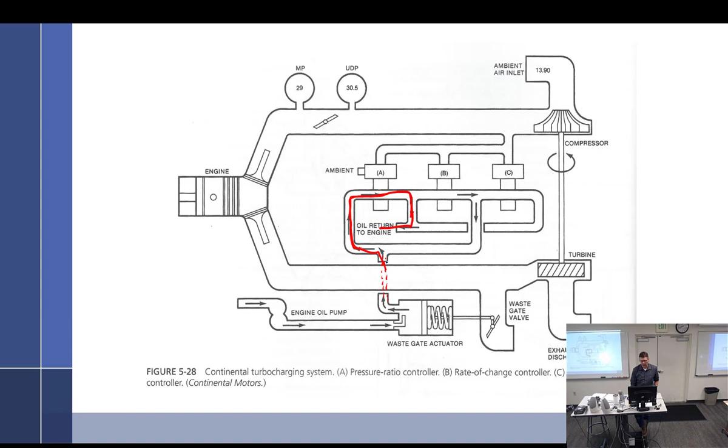So let's see. So we've got, so this will come through here. It can go through A and return to engine. We come up through here. That shows it. This goes through C and out. And see if we can get an independent. That has its own independent. So each one has its own independent route.

Why did the arrow show flow going backwards from the direction you're going? It doesn't. Oh, it goes backwards. Maybe the way I just drew it. So it's showing everything is... well, pressure is pressure. It can go either way. So 1, 2, 3. You can look at it that way, I guess. I was just trying to do it a different way.

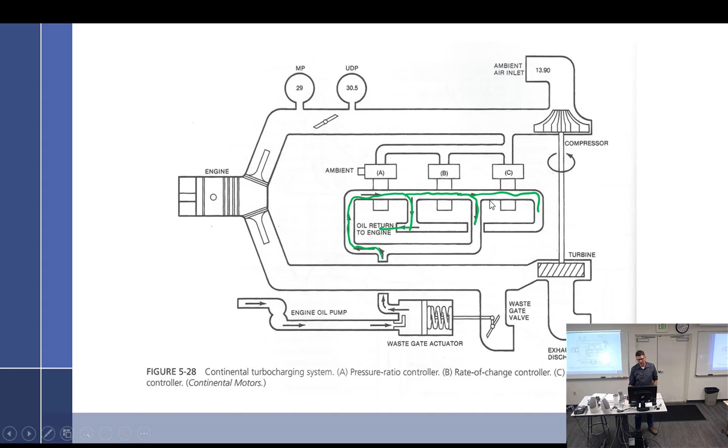But so they're in series or in parallel. Are they independent or not independent? They're independent, so I make them parallel. So each one can override the next one, which was the point there. All right, so we'll go to this.

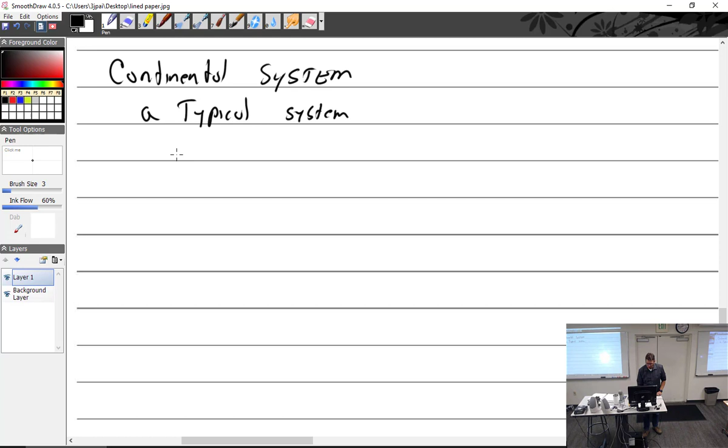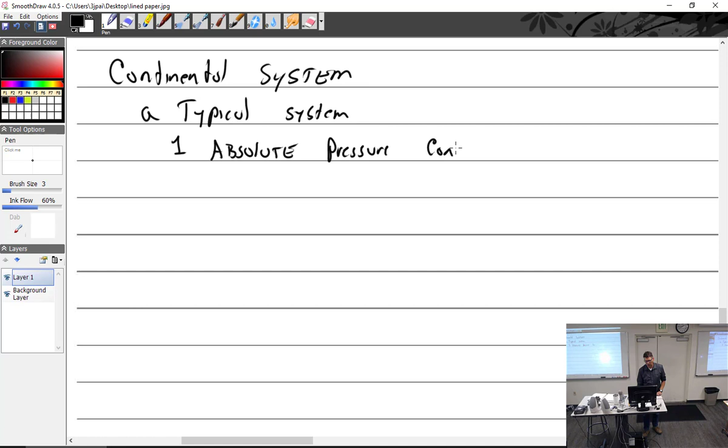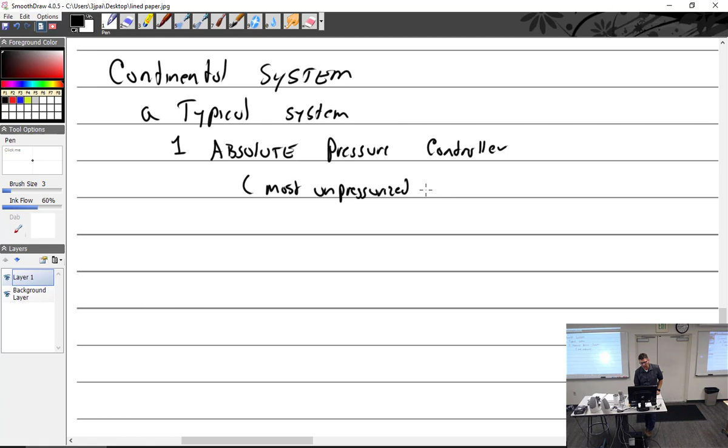All right, the Continental system. The typical system, typical Continental, because you can always get a variation of this. We have an absolute pressure controller. And I did have a note that I found somewhere that most unpressurized systems use a cam. So cam, that's the only note I wrote.

So I'm just going to think at one point I noticed that you had a throttled cam that would go just like we saw in Lycoming, that would adjust that absolute pressure controller, kind of like it would be the one we looked at, the variable pressure controller. Number 2, we have a rate of change controller. And number 3, we have the pressure ratio controller.

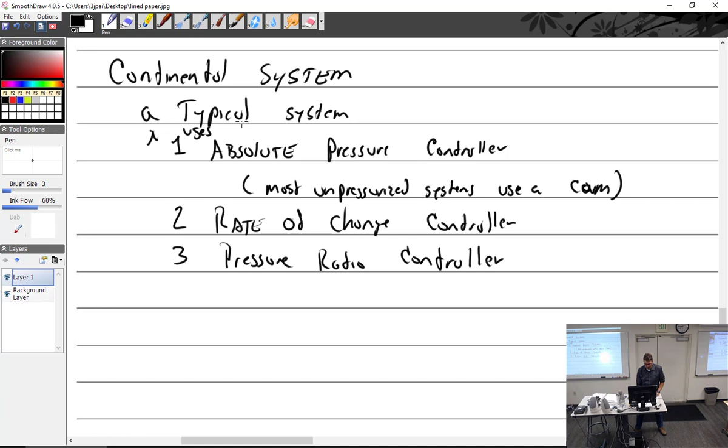So this is like one. Should put there, uses 3 different controllers. Number 2, all controllers are vented to or sense upper deck pressure. Just going to go back to this real quick. All of them sense upper deck pressure. So this is upper deck pressure up here. You can see every single one of them is connected to upper deck pressure.

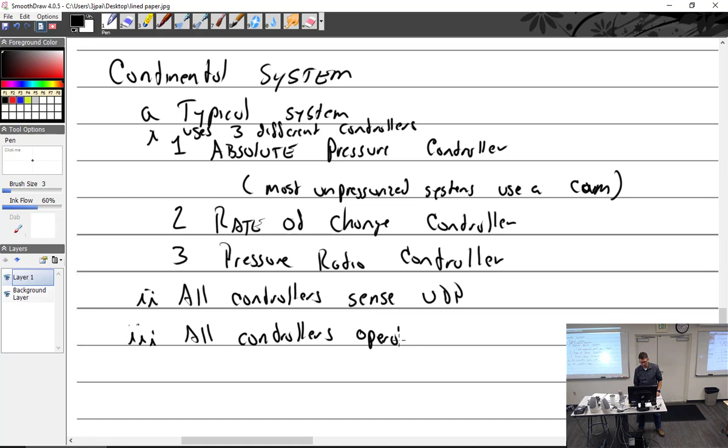All controllers operate to restrict or bleed oil, just like Lycoming. Oil, I'll say from wastegate, like the Lycoming. So nothing different there.

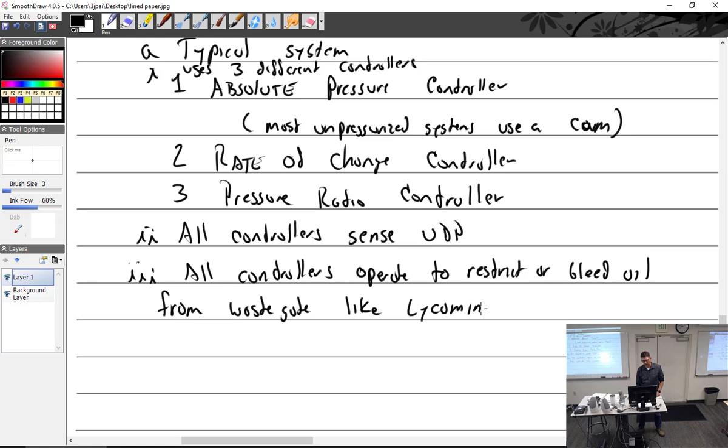But looking at each one independently, we'll start with the absolute pressure controller. That is designed to limit the maximum upper deck pressure. So if it goes above the specified amount, it'll open up and release. That is it. Okay, so absolute, so it's going to set your top end to that. Like the density. So you got it, so just like the density, we'll see. We'll put, design to limit maximum...

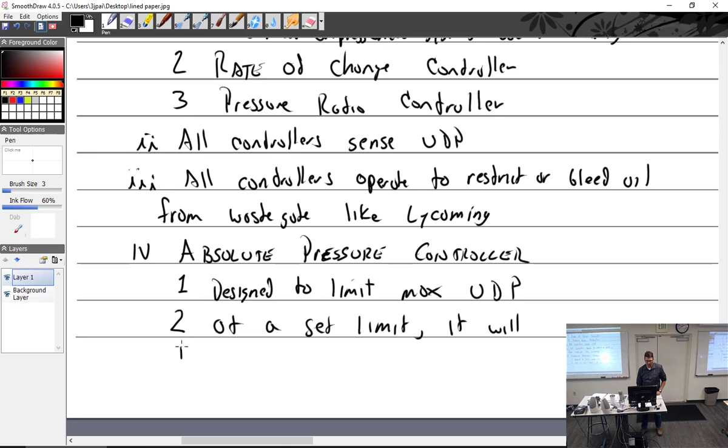Upper deck pressure. And number 2, at a set limit, it will bleed off oil, right? Open up, bleed off oil, let the wastegate start to go towards open. Turbo off. Can I move over? Okay.

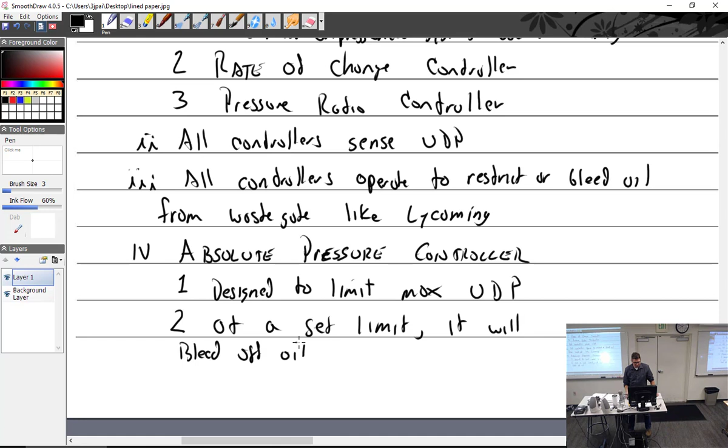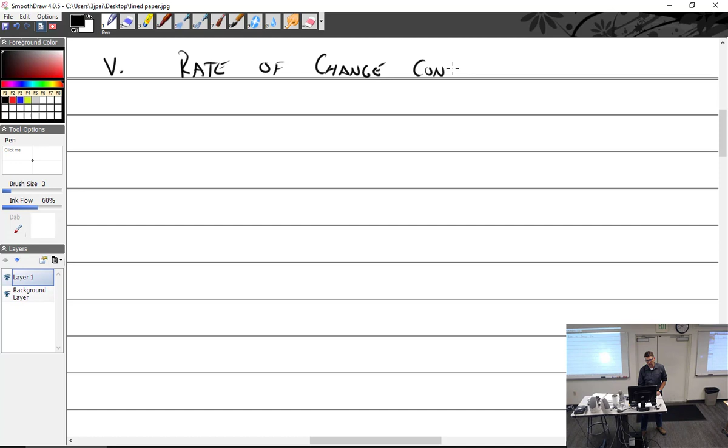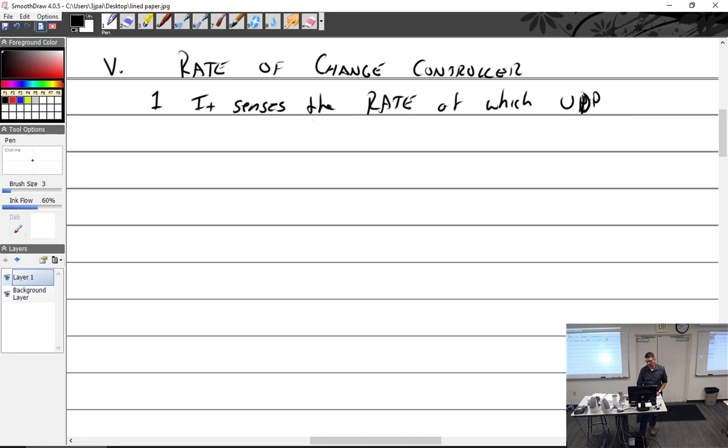Number 2, rate of change controller. Actually, it's not number 2, it's the second one, but it's point number 5, rate of change controller. It senses the rate at which upper deck pressure increases. The rate at which upper deck pressure, UDP, we'll get it down there, UDP increases. If the rate is too fast, controller opens, bleeding off oil, allowing the wastegate to start to open, causing the turbo to slow down.

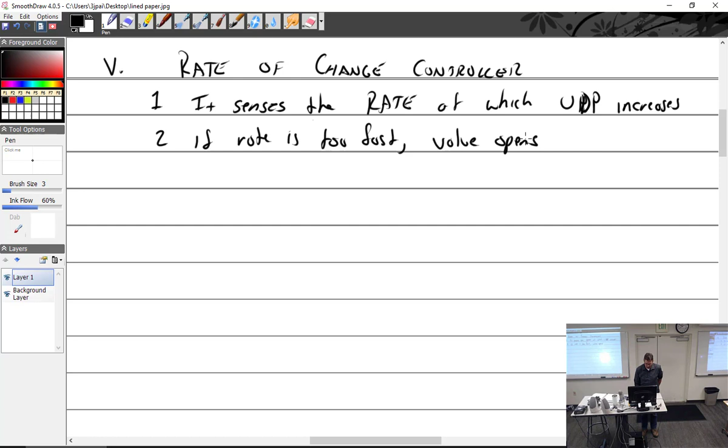Somewhere around here I had the actual number of what the rate was, and I don't know where I did with it. But, okay, next one, the pressure ratio controller. Which sounds a lot like differential pressure controller. So at higher altitudes, let me see.

The difference between this one and the Lycoming version is where it's sensing it. Notice there's no reference to manifold pressure, so it's strictly sensing ambient. Instead of the difference between manifold and upper deck, it's upper deck and ambient pressure, so it's going to be just a slight difference there.

At higher altitudes, the turbo obviously has to work hard, must work hard to keep upper deck pressure at maximum.

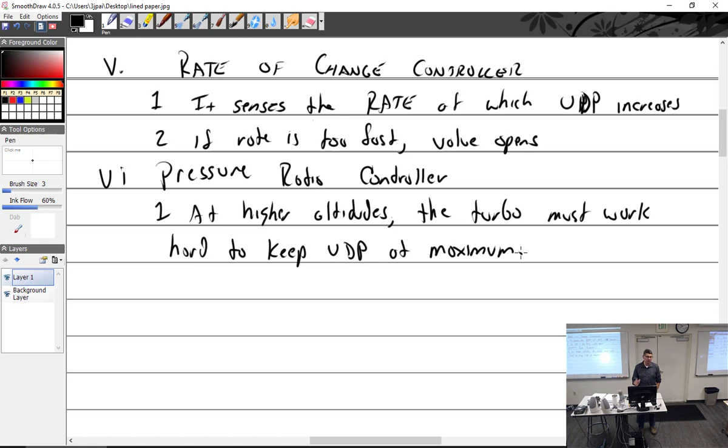So actually what I wrote: at higher altitudes, turbo must work hard to keep the manifold pressure set—it should be upper deck pressure set for max horsepower. So at maximum, I'll put horsepower.

So if you think about it, the absolute pressure controller's job is there—we have an absolute pressure controller, and it wants to see what in the upper deck? Pressure. How much? Whatever. All of it, right?

So the first one I talked about, the absolute pressure controller—its job, you can see, is designed to limit maximum upper deck pressure. So if we said, all right, even if it's just a normalizer, we want it at 30 inches. We get up to this high altitude, and the absolute pressure controller wants to see 30 inches, so it's telling the turbo, you got to keep going, man.

You got to keep going. And at some point we're going to get to an altitude where that turbo is just screaming. If it has the capability, it's going to keep packing air in, but the air is going to start getting really hot. So now we're going to start getting our air too hot, and we're going to start having some problems. So we don't want that.

But how are you going to program in the absolute to take care of this? Well, you don't—we'll put in the pressure ratio controller, just like Lycoming did with their absolute and then their differential controller. But this time we're not looking at the same differences; we're just looking at the difference between atmospheric and this controller. So it's another way to say, hey, pay attention to where we are in altitude, which you didn't get before.

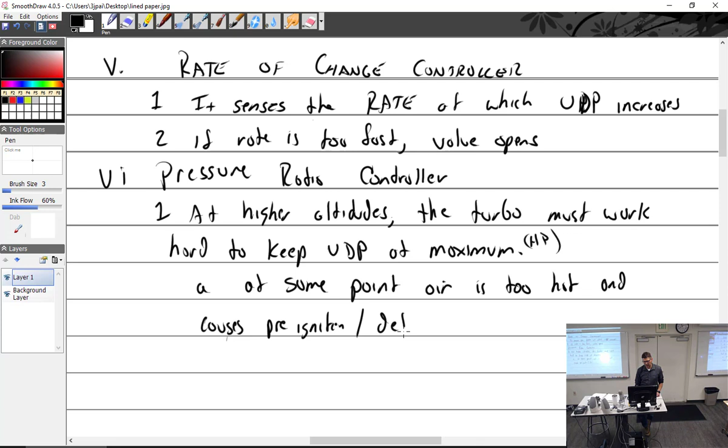But at some point the air will become too hot, causing detonation—the ratio controller keeps that in check. Air is too hot from the compression and can cause detonation or pre-ignition. And this pressure ratio controller, the PRC, keeps this from happening.

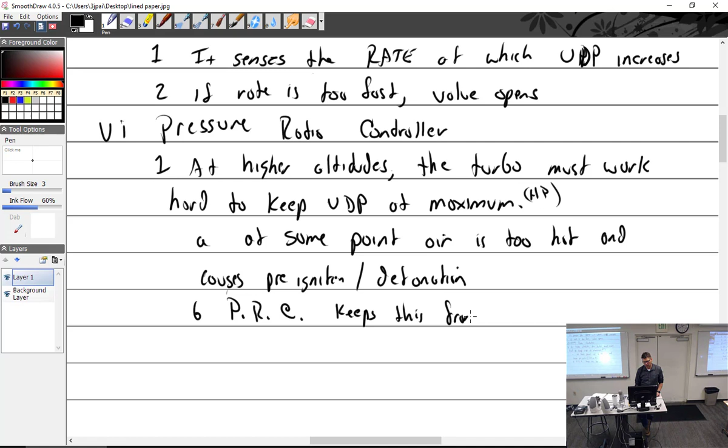And how does it do that? Well, it monitors the ratio, or difference, between upper deck pressure and ambient, and limits it to 2.2 times ambient.

Kind of think it through a little bit—if we just did 2 times for simple math. So if we're on the ground, 30 inches, this controller will allow it to go up to 60. Will it go to 60?

No, because the absolute pressure controller says, no, you don't. This one's like, yeah, but I want to go more. The absolute pressure controller opens and says, you're not going to do that.

So we start going up in altitude, and we're going to get to some point—I don't have the math in my head for that one—where this one right here is going to say, all right, we're at the limit now, we're kind of at 2.2. We're getting there; it's been closed the whole time. Got to 2.2, and over here the absolute's closed and that one's closed. They're both going to be happy for just a brief second, and we keep going up.

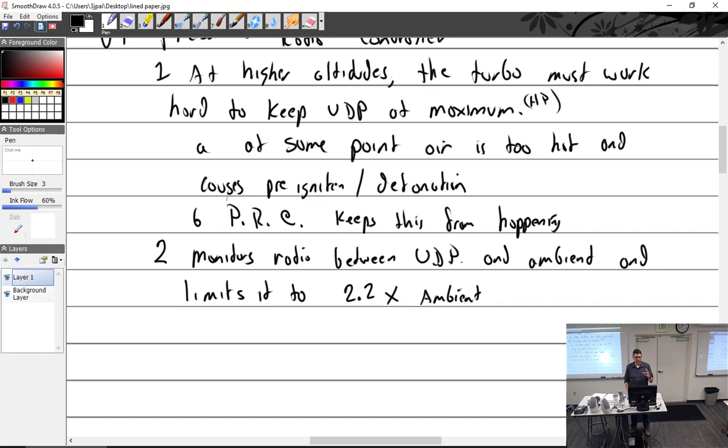All right, so we've started it up, we're running it, and we're idling it. So manifold pressure is going to start increasing until which one says no, you don't? And the words are right there if you can see them. Absolutely. I don't think not so much. My opinion - absolutely, I think absolute. Yeah, absolute would, if it can, at idle. Yeah, I think that'd be the first one.

Perhaps, let's just say, if you had a pretty fast idle going on there and the thing started to spool up and come up too fast, then it would definitely be absolute - the rate of change. Okay, then eventually it's going to be the absolute. And the rate of change isn't really going to have an effect unless you're actually moving the throttle forward. So let's just say then we line up on the runway, we're ready to take off, and we smash the throttles forward to go. Then rate of change - I think the rate of change will be the first one to pop off.

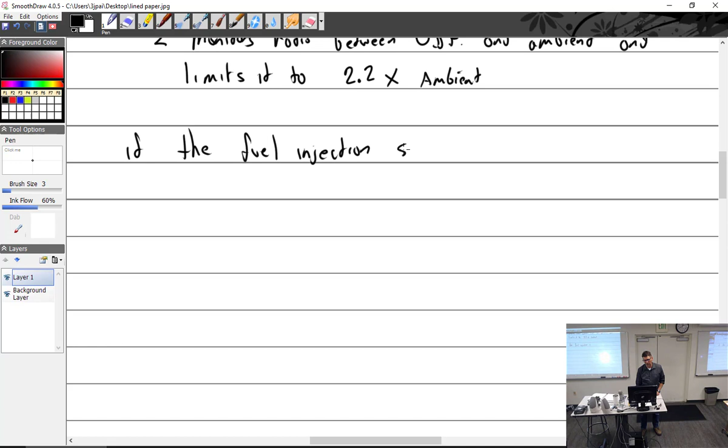All right, so one thing - I wish I had a picture, but I don't - this is an interesting point here. So if the fuel injection system, because this is going to be a Continental system, uses a variable orifice fuel pump.

Do you remember what this is by chance? PR, no, that's pressure. Okay, so we're going back to the fuel injection system from last week. Some of you are like, damn, that was last week, how am I supposed to remember this?

If we remember the fuel injection pump from last week for Continental, it didn't sense air, it sensed fuel. But the fuel pump had two controls, two settings, high and low. On the high end, we could actually put an aneroid on there and make it a movable orifice. It's adjustable, but you have to have a chart that'll tell you, if you're at this altitude and this temperature, adjust it for this fuel flow. But then from there, it's going to be sensing upper deck pressure.

So what would happen is, if upper deck pressure is really high, manifold pressure, that would make more sense. If manifold pressure is really high, do we want more or less fuel? We want more. A lot of air, we need more fuel. To get more fuel out of the TCM system, we go back to the main metering orifice.

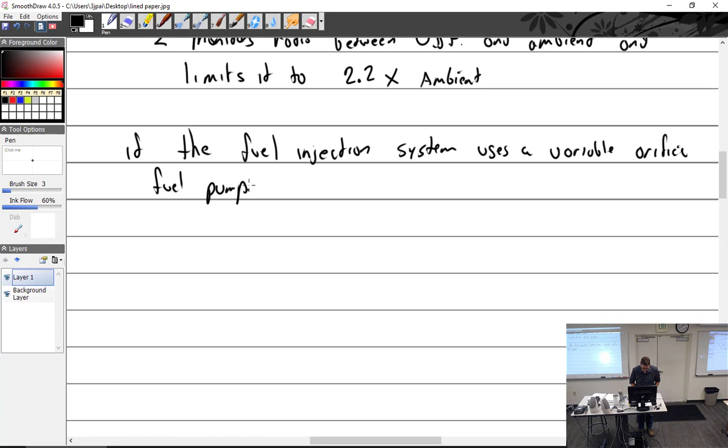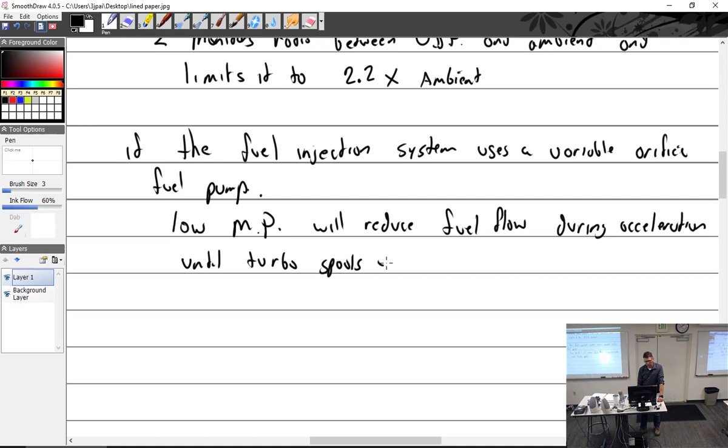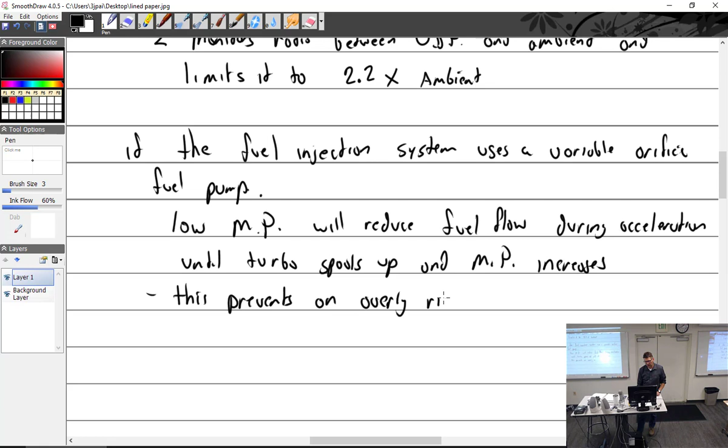Variable orifice, yeah, low. Okay, fuel pump. So low manifold pressure - if we're still low manifold pressure, it will reduce fuel flow during acceleration until the turbo spools up and manifold pressure increases. And this prevents an overly rich mixture due to turbo lag.

I had a cat named Turbo. Thing was wild, my wife brought it home. Climbed the walls. Every time you try to pet it, it like run away or what? No, I just climbed the walls and all kinds of crazy shit. Yeah.

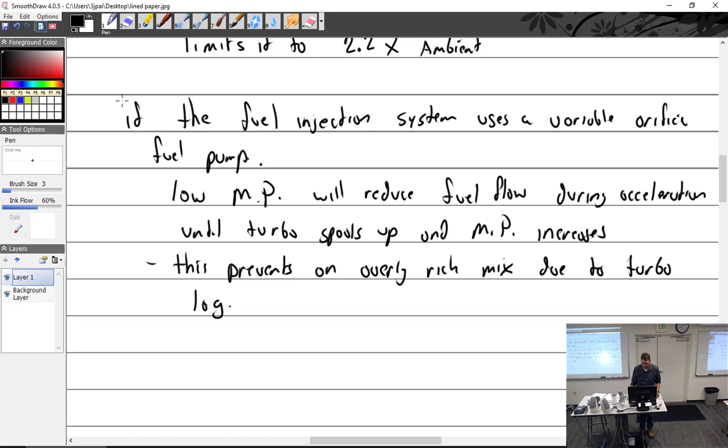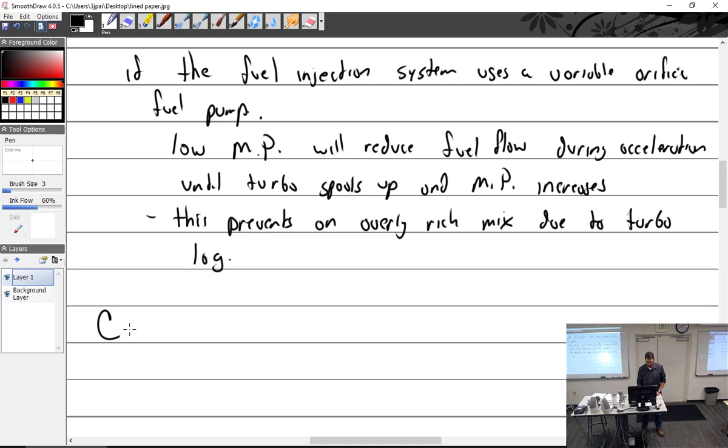All right, let's see. C. Other TCM systems, because we can't have just one, that would be just too easy. We have the variable absolute controller.

You ever get the feeling that turbo systems were designed by a committee? It's like this committee's in charge of that, this committee's in charge of that, and they all kind of get together.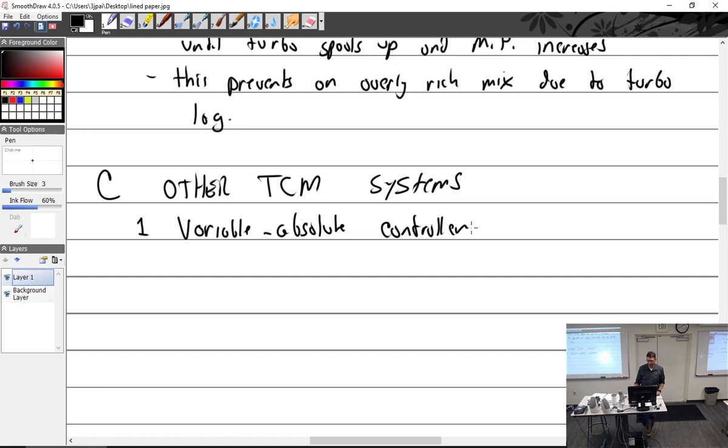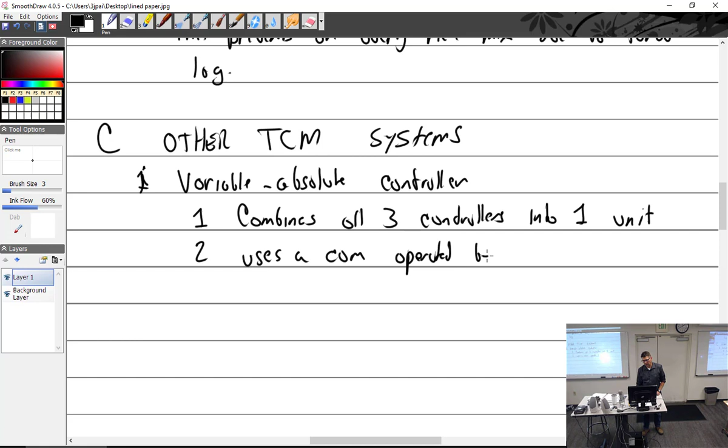This uses a cam operated by the throttle to vary spring pressure, which I think then takes care of the ratio issue right there, like Lycoming would. Yeah, the Lycoming variable controller.

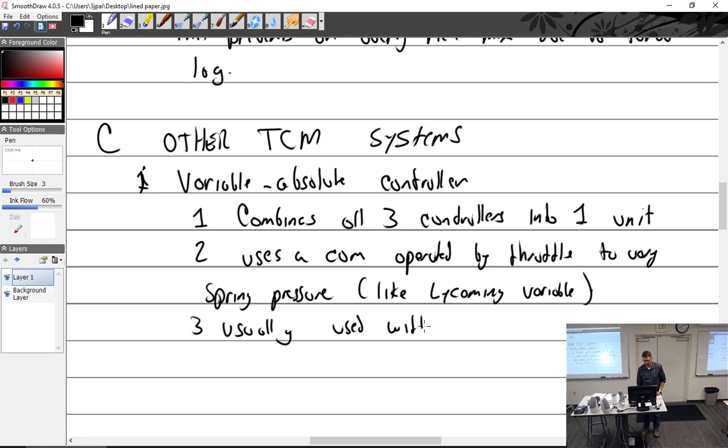And this one is usually used with an overboost relief valve. That's the spring-loaded poppet that vents upper deck pressure if it is too high.

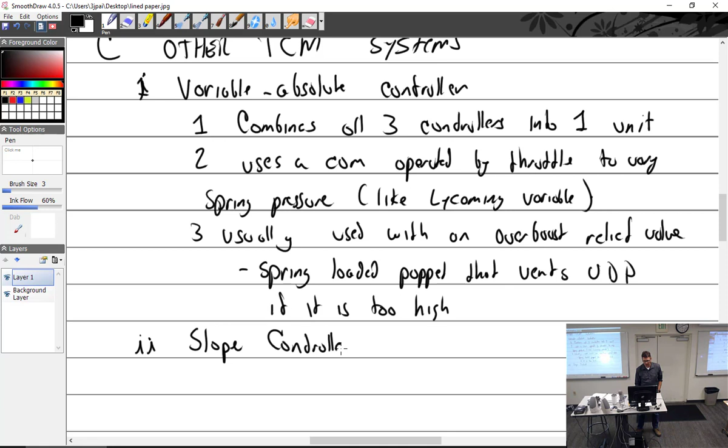And one other one, in keeping with the tradition of slope controllers, which once again does not provide a whole lot of information, and it's kind of a quick one. So this one references upper deck and manifold. What does that sound like? Yep, to maintain upper deck, yes.

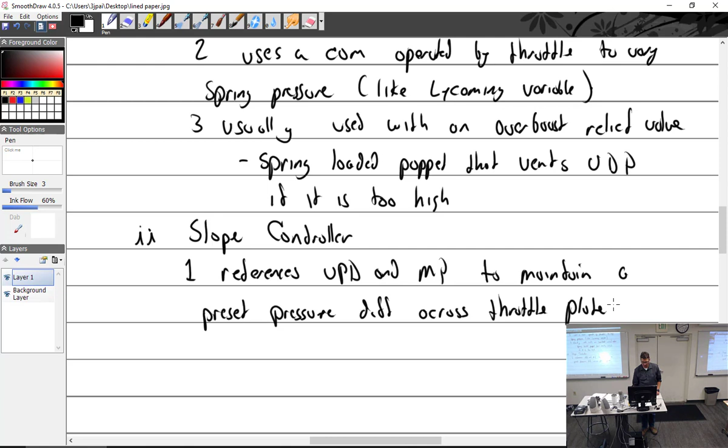So that one is the differential pressure controller. References upper deck pressure and manifold pressure to maintain a preset pressure differential across throttle plate. And there, that is all of our controllers. Sounds like slope control, they're just like, yeah, they do the same thing. That, it pretty much, yes.

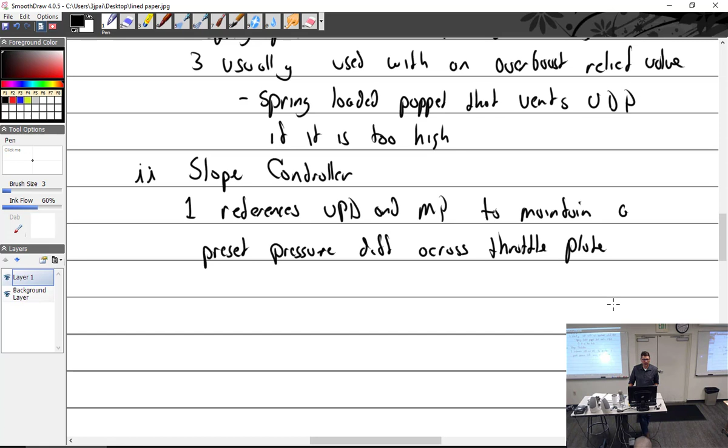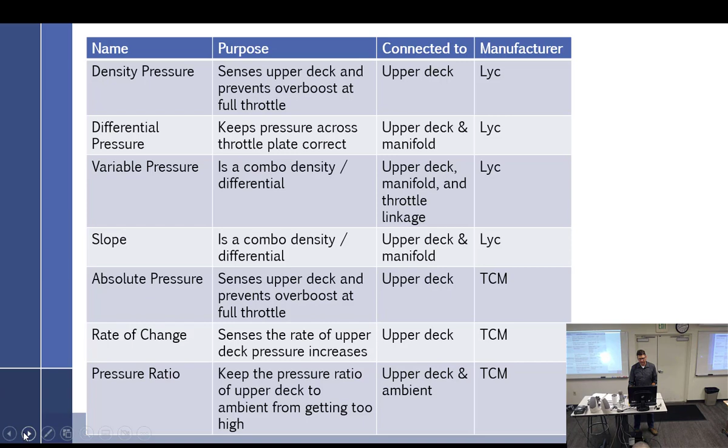I didn't have a lot of room. So references upper deck and manifold, and the variable pressure combination density differential, measuring upper deck, manifold, and throttle linkage with the cam and the spring. Slope control is a combo density differential. We have the absolute pressure controller, senses upper deck and prevents overboost at full throttle. The rate of change senses a rate of upper deck pressure increases. And the pressure ratio, which keeps the pressure ratio of upper deck to ambient from getting too high. Just remember all that. Yeah, shit.

All right, intercoolers. Used on both Lycoming and Continental. Cools the air after it leaves the compressor going into upper deck. Because what we have is very hot air, which loses its density. If we can cool the air back down, then we get some of that density back.

That is typically mechanic damage. Anybody ever pressure wash your grill on your car? You usually don't make that mistake twice. Imagine with the air conditioners outside, the window ACs, you push the vents in the back. Yeah, so I have a radiator comb, I'd go in and fix them all and stuff.

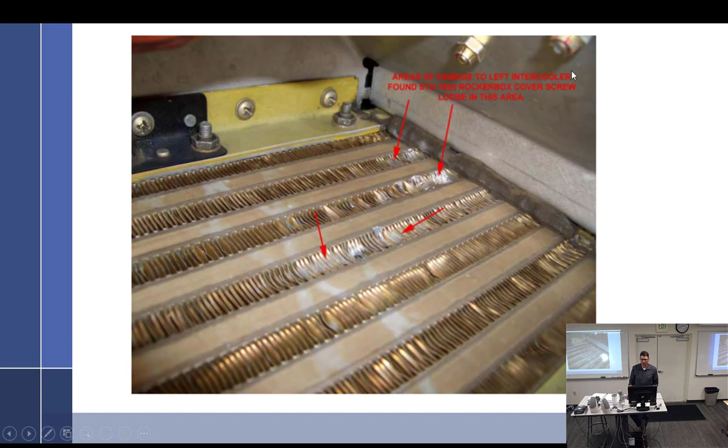And then air goes over the top. So, let's go back to the beginning. Not that, there you go. So the cowling is going to have ambient air, if you will, coming through, across, down, and overboard the heat exchanger. And then, of course, your pressurized air is going to come up through this way, the hot air, through here, and off into here. So the ambient air is definitely cooler. So it's a radiator, yeah, it's an air radiator.

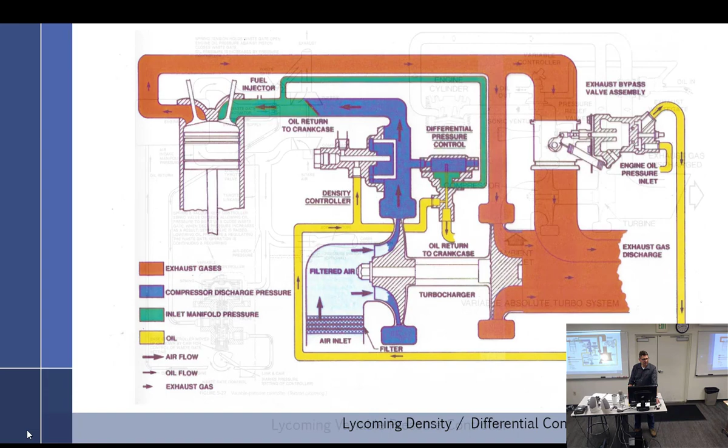What kind of temperature drop can you expect? I don't actually know. Well, it's going to obviously depend on the ambient air, right? Hot day, cool day. Do they ever duct air conditioned air? No, I don't think so, because air conditioning systems on light piston aircraft...

Oh, help yourself. Don't be shy.

Air conditioning systems on light aircraft just don't feel as robust as they are in cars. They don't work quite as well because they create drag, they heat up the engine, and you have to run the compressor.

There's no free lunch, and a lot of them are electric driven too. I've worked on some airplanes where the actual compressor was in the baggage compartment running off an electric motor. The idea was you run it on the ground, but as soon as you take off, you got to shut that thing off.

Which makes sense because you don't have an air conditioner. I do, actually, sliding canopy, I've got the vents right here. I have a funny story about that one. It's free, a bottle and a bucket of ice. You only need it on the ground, once you take off you should shut it. 120 knots.

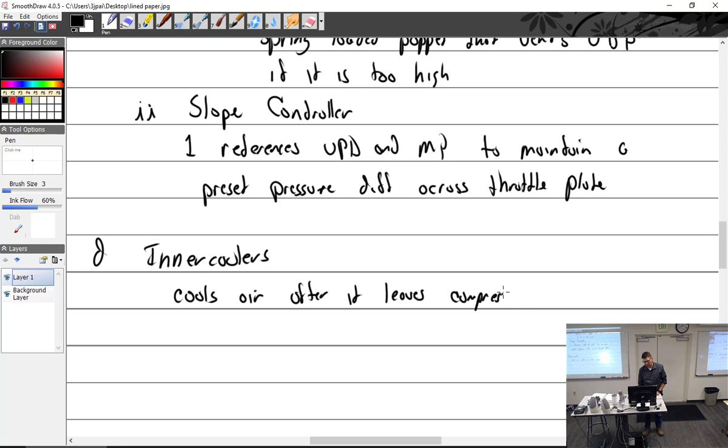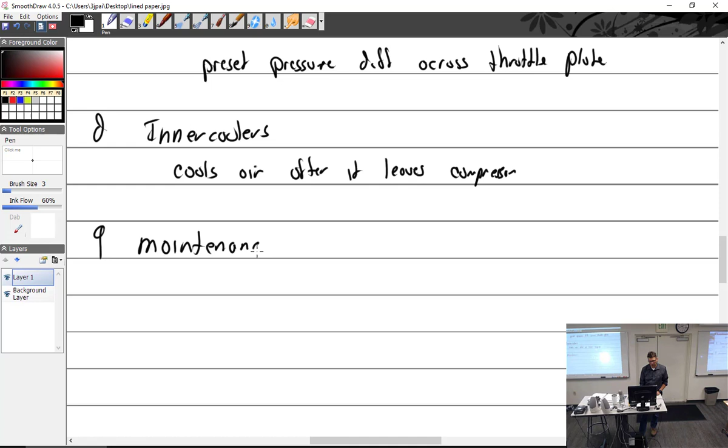All right, talk about some maintenance. Sometimes I think we spend way too much time on theory, not enough on how to actually maintain this stuff. But the whole point behind theory is you have to troubleshoot it and understand it. If you don't understand it, it's like, well, it's a turbo, I don't know what it does. It's kind of hard to work on them. All right, maintenance.

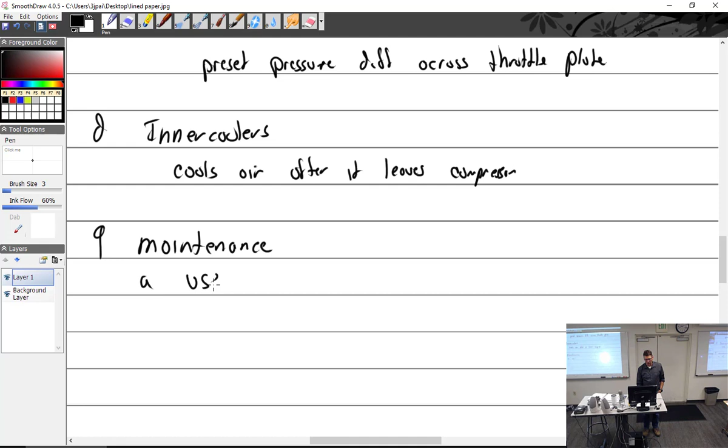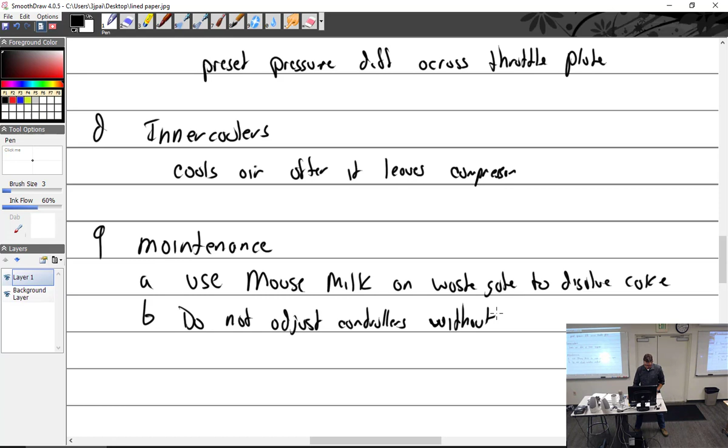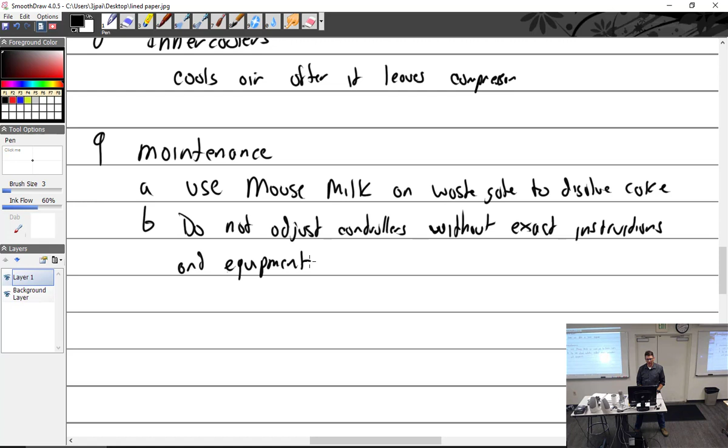We use mouse milk, mouse milk on the wastegate, to dissolve coke. Do not, and all manufacturers are very, very adamant about this, do not adjust controllers without exact instructions and equipment. It gets very, very detailed on what they want you to do and how to do it.

Kevin, what is mouse milk? You use it as a penetrating lubricant, but you say it dissolves the coke? Well, they say it dissolves coke. I don't know if it does that so much, because where are you getting the coke from, really? But I put it on all the little moving parts, and it kind of dissolves whatever is there and helps it move much freer.

All right, back to this while I still have a job. So Kevin, it makes you feel easier, I'd say more than half of your videos have some point in it like, don't worry, I'll edit that out. There you go, say that. I'll edit that out, nobody will ever know. I don't spend time to edit this stuff, obviously.

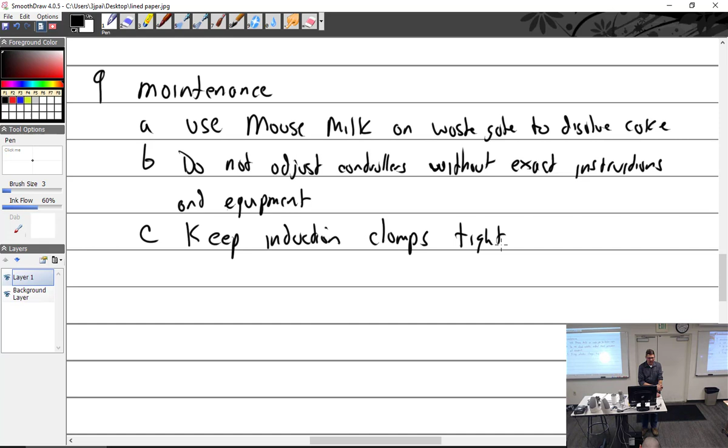Keep induction clamps tight, there's just worm drive clamps. So, funny thing, I never thought about this, they mentioned it in Rotax school: Rotax don't have worm drive clamps because they're water cooled. The water hoses, like on your new cars, just have those spring clamps where you use a plier, and you think, cheap crap, so you throw those out and get a nice worm drive clamp and really tighten it on there.

Rotax said no, those are worse, the spring clamps are way better. You have expansion and contraction - if you have a worm drive clamp, it doesn't expand and contract, it just cracks and breaks. So you put the spring-loaded clamp, which actually will move with whatever is happening. They said don't ever change those out. Anyway, we want to keep all of our induction clamps tight, we have lots of them.

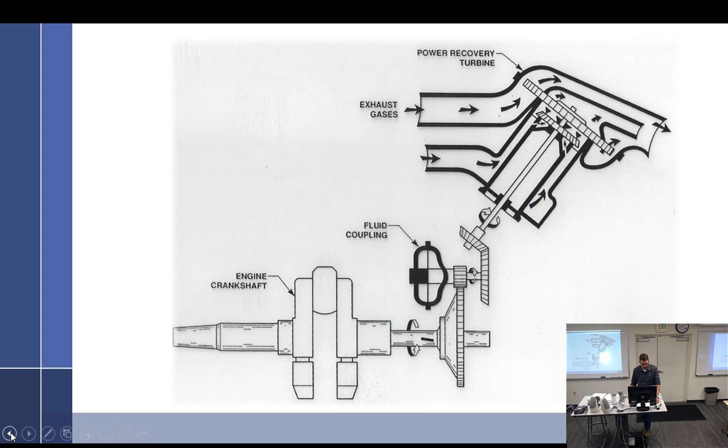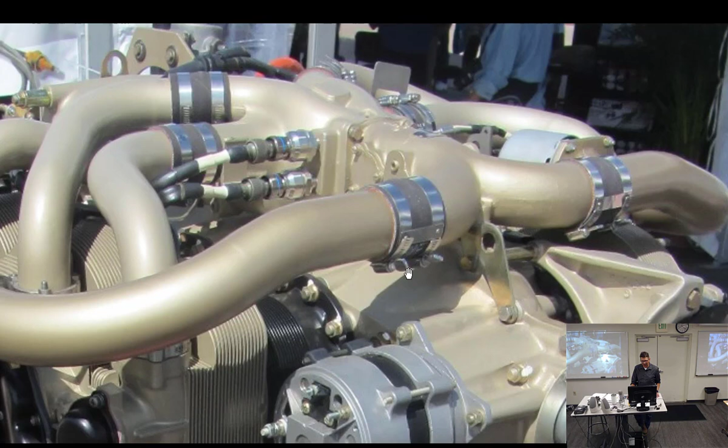There's actually a torque on them. And believe it or not, see that it's not a hex on a lot of them. So it's like, well, how do you torque those? There's a particular 6-point socket that'll fit right over those anyway. Mac actually makes a socket that's got a groove cut that fits over perfectly. Snap-on has a 6-point socket that fits over perfectly too. I wonder which one's cheaper.

So, keep them tight. Look, they're not even the same. Over there, they got the hex nut type. Okay, all right, so we want to keep those clamps tight.

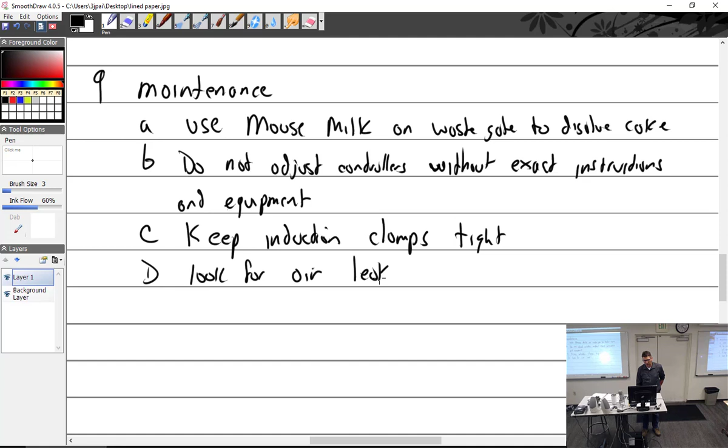Look for leaks. Look for air leaks. What's an indication of an air leak? Induction leak. An indication. You're a mechanic. Yes, it would run lean if you have an air leak, for sure.

Well, okay, let's take that one, because it made me think about it. What would be an indication of an air leak? Oh, what are you going to say? EGT rise. Oh man, we could have an EGT off on one cylinder. We've got, you said run lean, which we'd notice at idle cutoff. Yeah, idle cutoff. You're not, hey, it used to be 50 RPM rise. Now I got nothing. What are we going to do?

Oh, we'll just back the screw out a little bit. Well, wait a minute. What happened? Why did it suddenly not work anymore? You keep backing the screw out, hey, the screw came out. Could be an air leak. It's still leaking, still leaking, this is leaking worse. Okay, but this is fuel injection, so it would work different.

I did have on here, I still have it, blue fuel stains. Why would we not get blue fuel stains on this system? Yeah, it's fuel injection. Because it's fuel injection, and how much fuel is right here? None, and none, and none, and none, all the way down to here. Where's the fuel? Right there. Sprayed into the head, right? Actually, no, that's the drain back tube. So it's sprayed in over here. That's a good point.

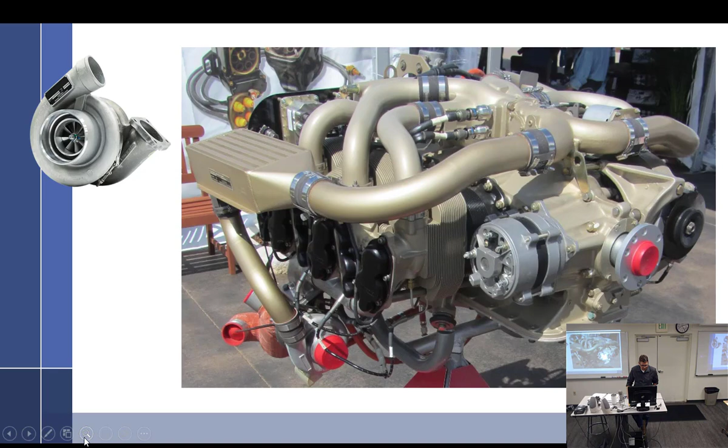These do have drains on the bottom of some aircraft. So that'd be a drain right there. So if you overprime it, it's got a place for the fuel to go. That usually means there's a sniffle valve. Maybe it's a sniffle valve, I think. But a sniffle valve is a little ball check valve. So when the aircraft is off, the ball falls down and it creates a passage where fuel can leak out. And when you start the aircraft, the ball gets sucked up into a seat and there's no more air leak. So you got to watch those.

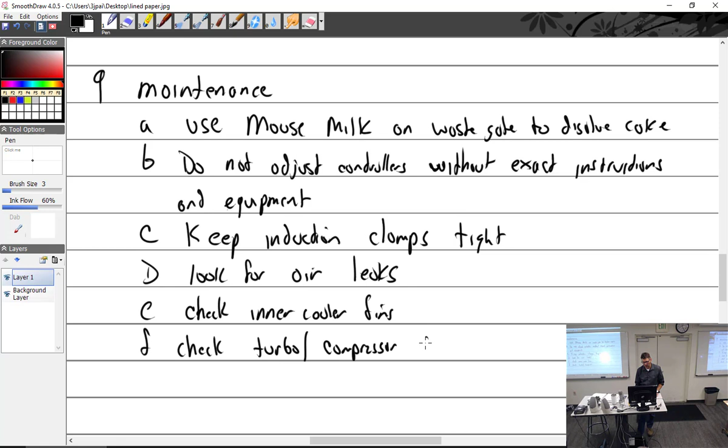Okay, let's see. Check the intercooler fins for damage, blockages. Check, I wrote rotables here, but I don't want to use that word. So check the turbo/compressor for free turning, no rubbing. And we'll check the compressor for FOD damage, or FOD, depending on what the D stands for. What does FOD stand for? Foreign object debris damage. But if the D stood for damage, then it's foreign object damage.

Looks like what? CAC card. Tac card, CAC card, common access card. Oh, when the military ID card changed from the old standard green card to now the CAC card, everybody started calling it the CAC card, but it's really just saying common access card.

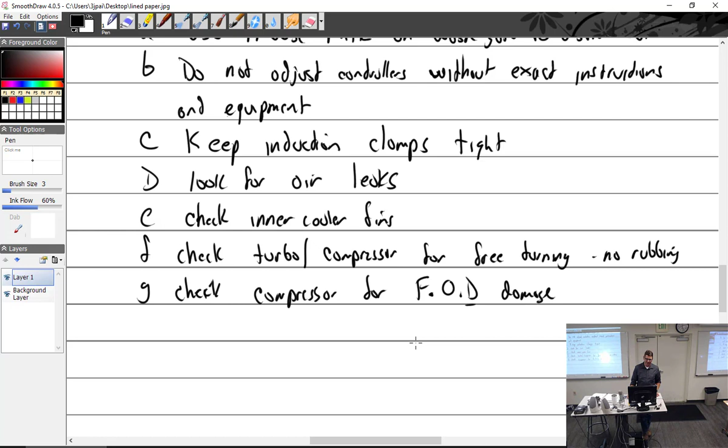Which would be like La Brea tar pits. Well, who speaks Spanish? La Brea. What does that mean? The tar? Or it's like the tar pits, something like that. The Los Angeles Angels. The Angels, the Angels. They did it to themselves. You need money, they did it to themselves. So I went to the automatic ATM machine. Exactly.